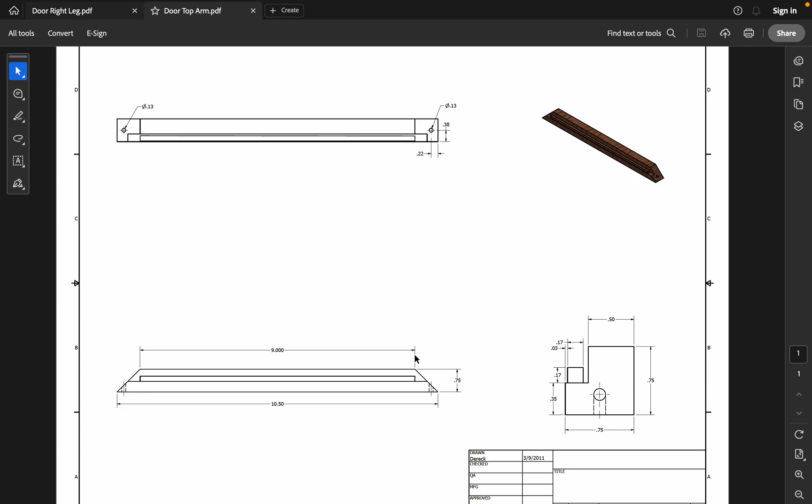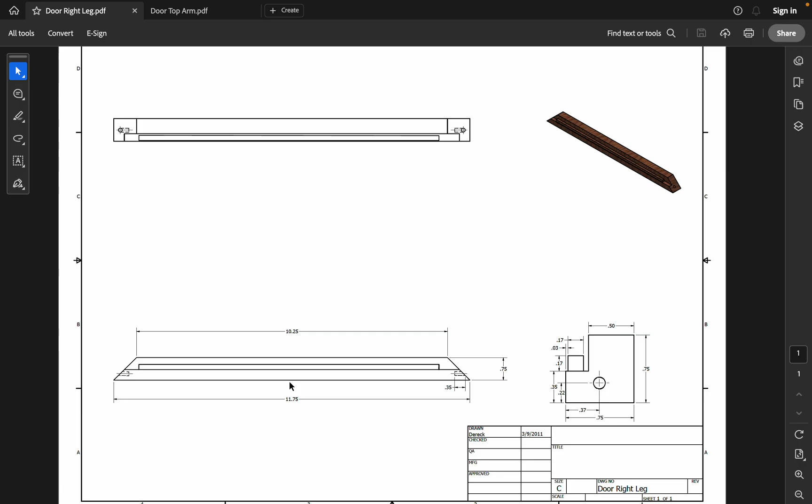Okay, so we're making our next part. It's going to be the door top and bottom arm and the door right and left leg. These parts are going to look pretty much the same. The main difference is their length. The right one is 11 3/4 long, and the top one is 10 1/2.

So I'll just make one of the parts here, and then you can end up making it a second time. Now you only need to make one of each part. As you put them in the assembly file, you're going to be able to just duplicate them. So create both top and right, and then at the very end you can name them top/bottom, right/left, so you can keep them kind of distinct. So I'm going to start with the door top arm here.

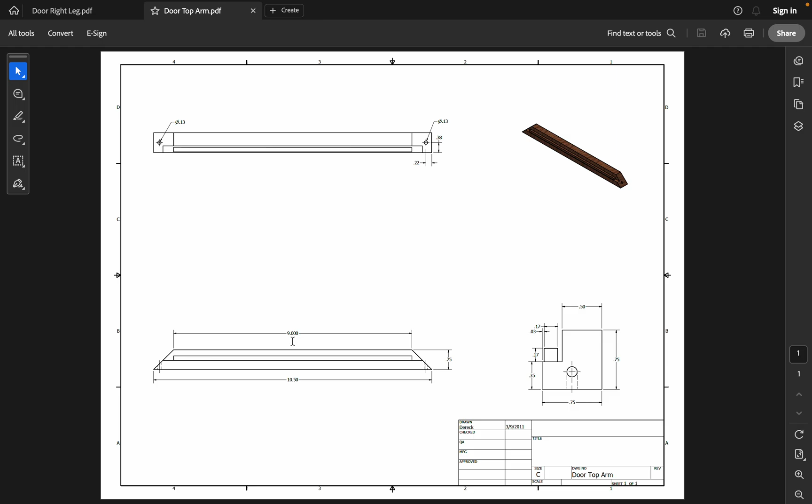So looking at the plans, my front view, top view, then I got the right view, and of course the 3D view. So zooming in on this part, you'll see that this is going to end up being two separate pieces. You're going to end up gluing a scrap piece in there to hold the glass pane in. Now there's also holes in the miters here. That's going to be for dowels, another type of joinery. So we've got to miter these and dowel them, and then we'll make a piece of scrap to glue in the glass pane.

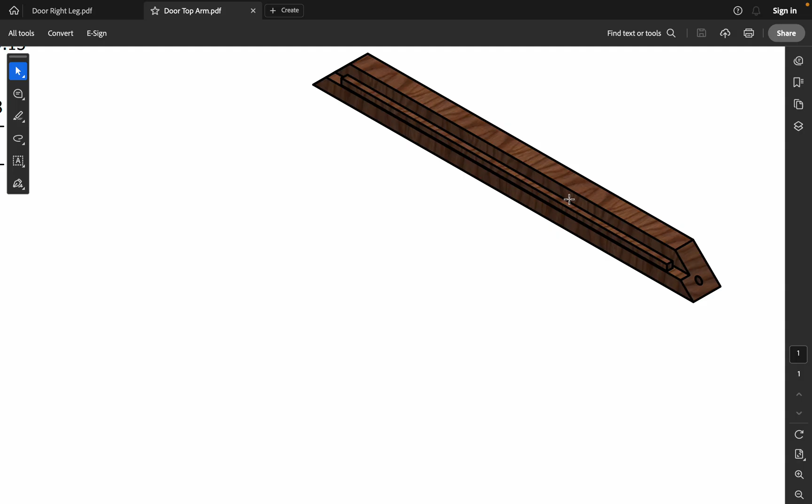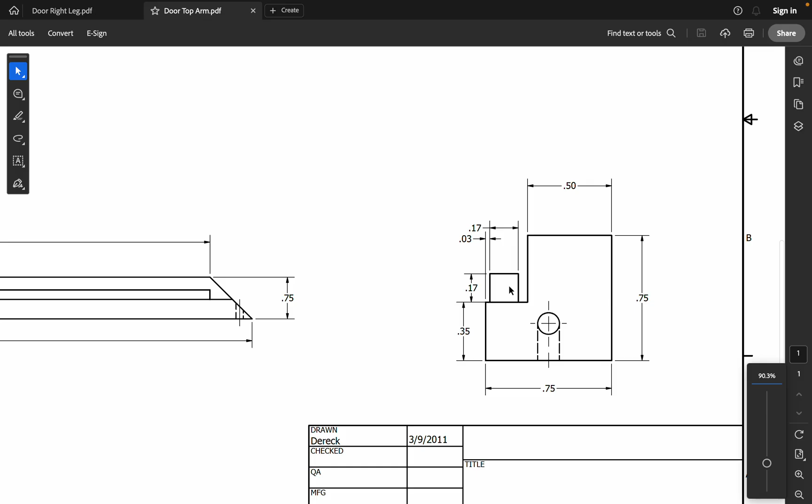If you already watched the base, you're going to end up mitering them the same way, 45 degrees. And instead of adding a groove, you're going to add a little rabbet right here. So we're going to notch that out. So what I'm going to do is draw the right view here. I'll make the rectangle, and then I'm going to cut out this spot right here, and I'll leave this guy and put him in at the very end. So let's jump into Onshape, and I'm going to start with a rectangle that's 3/4 by 3/4.

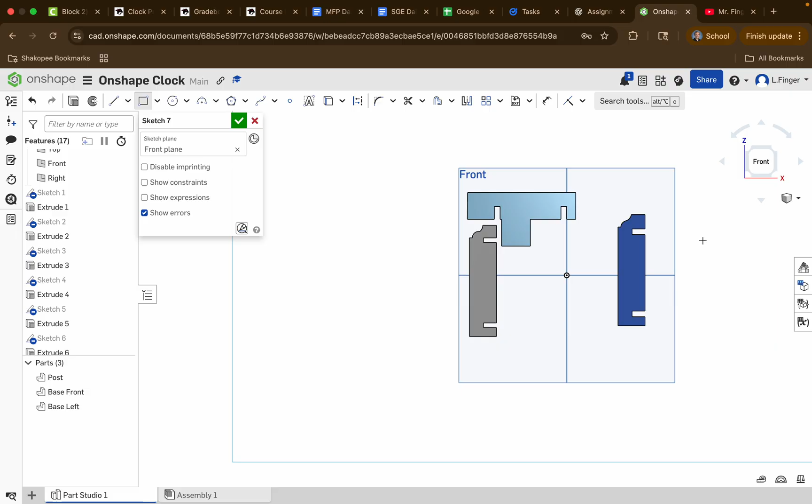So here's Onshape. Go to sketch mode. We're going to click on the front, and we're going to hit front on the cube. We're going to use our rectangle to make this rectangle stock. I'm going to put it a little bit further away so we can see what's going on. Okay, 0.75 by 0.75. Good. So we got the maximum thickness and width there.

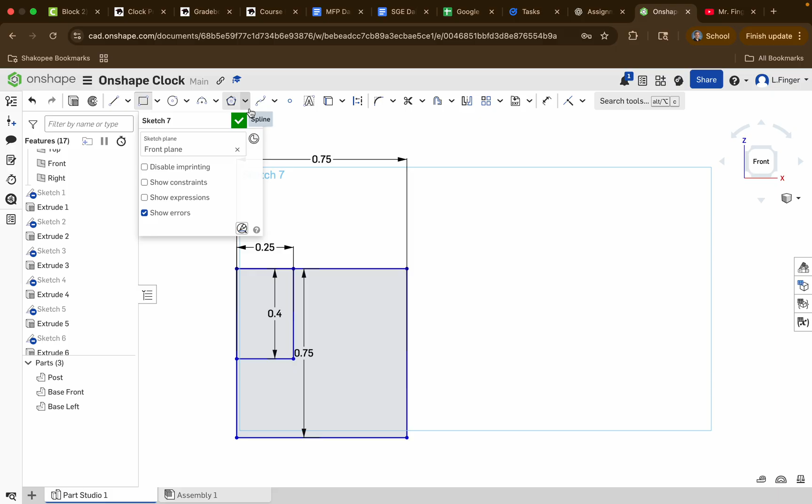Now I'm going to put a second rectangle in to cut this out. This rectangle is going to end up being 0.75 minus 0.35, so that's 0.4. And then this measurement right here is 3/4 minus 1/2, so 1/4 inch. So from this corner, click it, drag it down. The first number that highlights is the top one, so let's do 0.25. The other one is 0.4. Good. So first sketch is done. Hit OK. Now it's hidden, so let's rotate it.

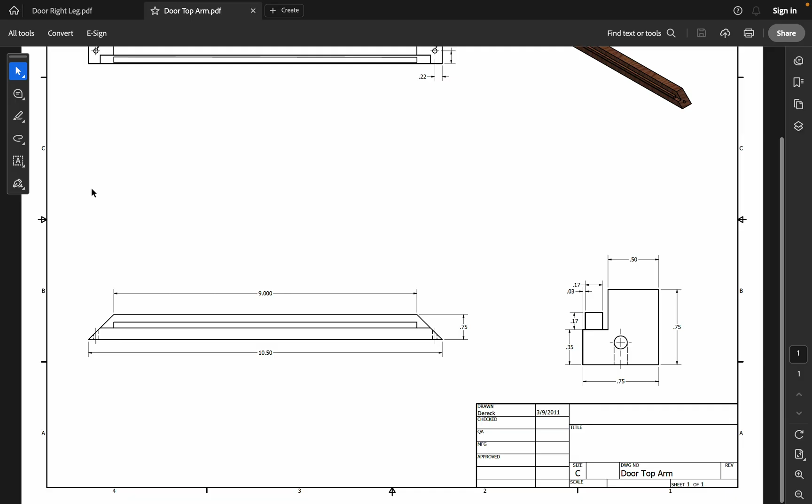We're going to extrude this 10 1/2. Now if you were going to do the other one, since this is the top arm, it's 10 1/2 for that longest dimension. The right one would be 11.75. So we're going to go 10 1/2. Good. So we got our main part of the arm done. It's time to miter it, and then we'll glue in a piece of scrap.

So to miter this, I'm going to flip it upside down. Now we also want this side in. You don't want to actually see it. You don't want to see the edge of the glass pane. You don't want to see the scrap.

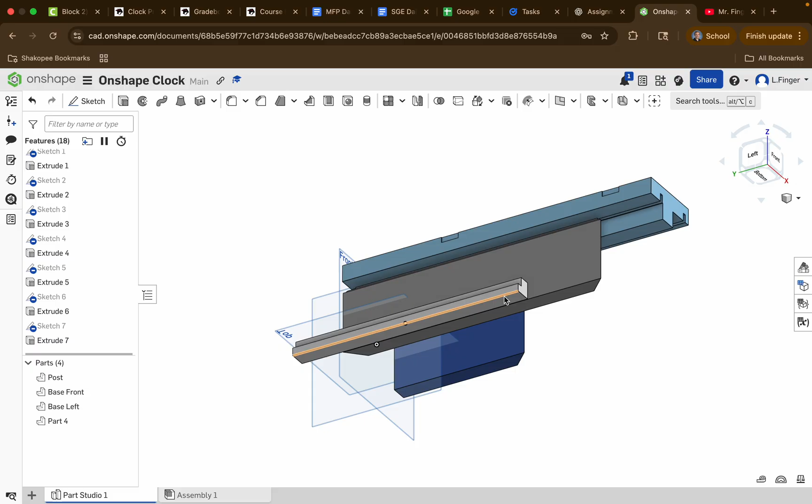So we need to end up mitering it so you won't see it when you glue it together. So flipping it over, that's going to end up meaning this corner will cut into the part. So it looks like it's this corner cutting in. Just making sure. Yep, we want this side, this exposed edge, to be long, just like this one. Where the grooves are on the inside, this cut is on the outside.

So we're going to sketch again. Sketch this face. Grab our line tool. Click from corner, over, and then we're going to click from this corner, in. Okay, so they both should be pointing in. So when you add a second miter, it'll make 90 degrees.

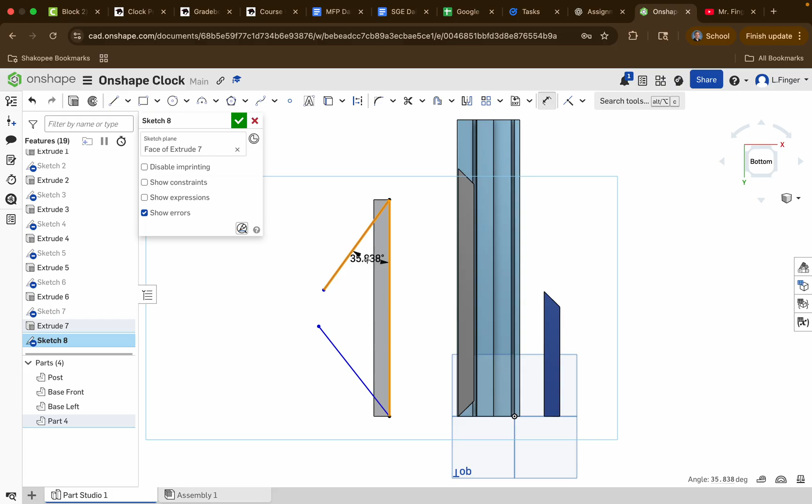Now, I just guessed the angle there. It's not going to be correct. Use your dimension tool to force it to be. So this angle right there, okay, that needs to be 45. Same with the next one. 45. The last step with the miters is to finish sketch and extrude by removing. Okay, 1 inch is fine. Cut it away.

There it is. So we got the first door part done. We got to add that scrap piece in to glue in the glass now. So let's rename this to door top slash bottom. Top slash bottom. Okay, then I'll make the right left one after. As far as the dowels go, we're also going to leave those out for the time being.

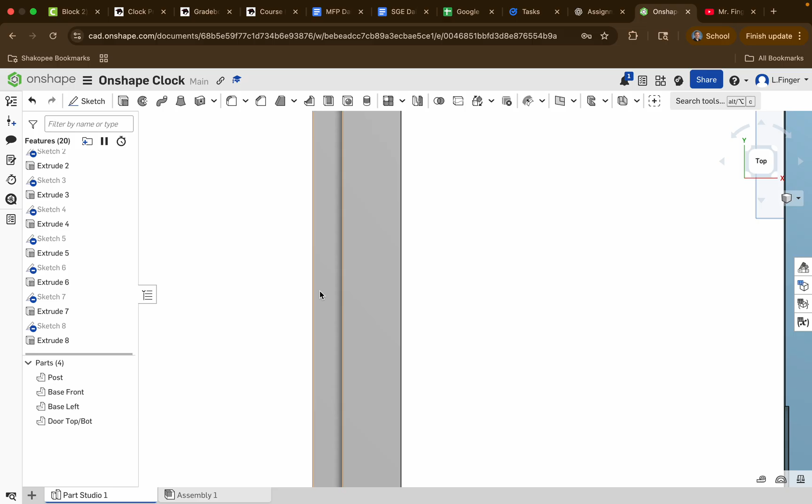So we're going to go top down, and we need to sketch a little piece of scrap in there. So if I look at this from the front view again, that scrap sits on the smaller side there. So we got to put it right in there. All right, so I'm going to zoom in. I'm going to sketch this plane. Okay, and I'm going to use a rectangle.

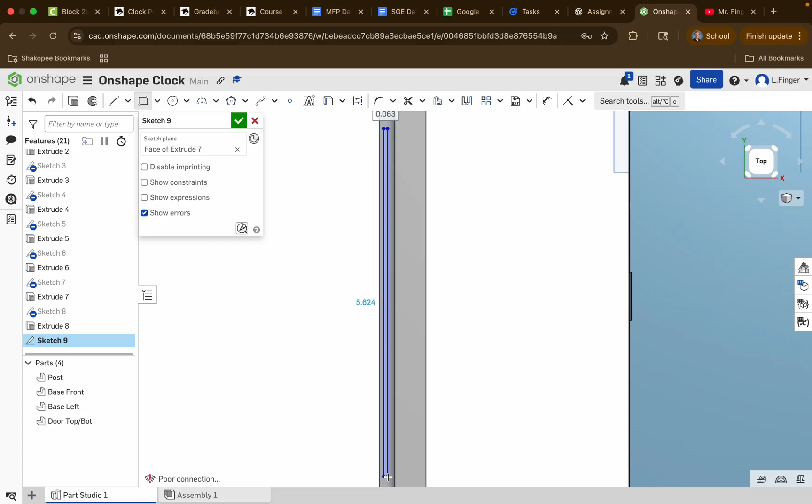And you can put just a small piece in there. Doesn't matter if it's 5 inches, 6 inches. You know what, I could make it 8 inches. Okay, but we don't want it to stick out. So if you're able to move it down, I would move it down. I think I'm just going to Command Z, leave it pretty small. Doesn't have to be super big, as again, it's just scrap.

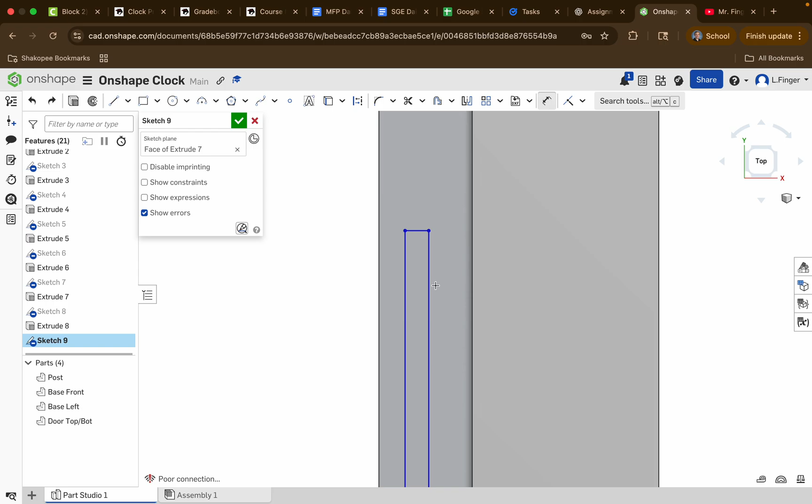All right, what is the dimension of this right here? So just a 16th. We're probably gonna end up working with a 1/4 inch here. All right, so it looks like it just saved my length. I'm gonna end up deleting this piece here and trying again. Let's just make another rectangle. Sketch, rectangle.

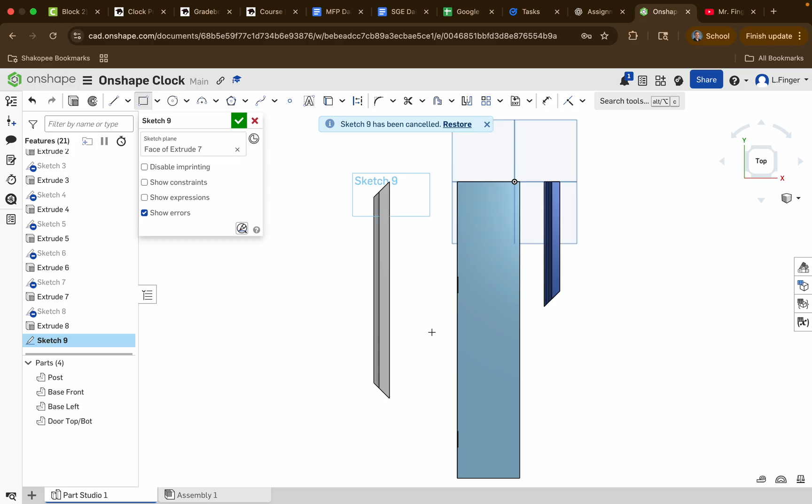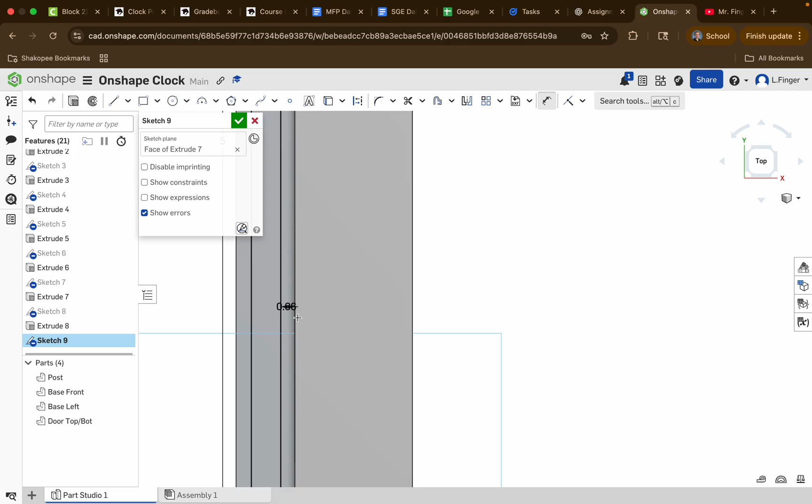Okay, from here over, let's make that point. Oh, let's make that 5. And then 0.125. Okay. And then we're going to space this out. The total distance is a 1/4 inch. So let's just make this a little bit less, like a 16th. So 0.06. Okay. And that should be pretty good.

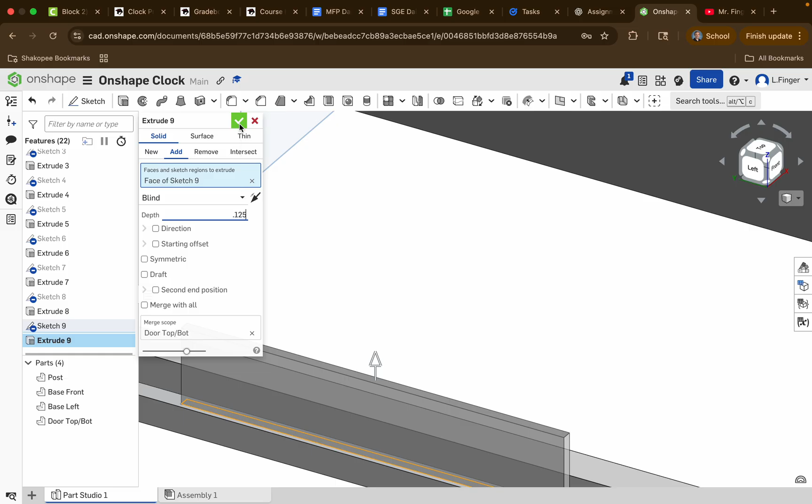Now again, I could make it longer. I can make it look prettier. I think I'm going to leave it for now. And now all we have to do is extrude it. So, extrude. Click that surface. And let's make this also an 1/8 inch, 0.125. Okay. And there it is. That's the last part of the door top/bottom. Okay. So you would make another one.

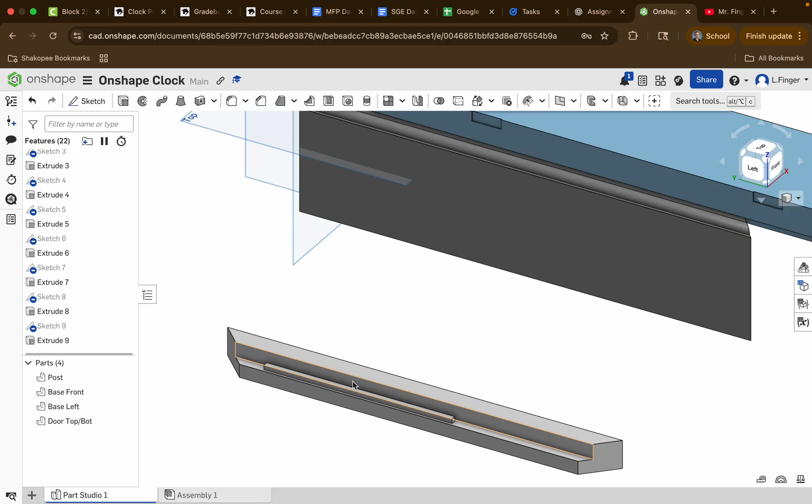Yep, this scrap piece doesn't look very good. I encourage you guys to make it look better. You can use the dimension tool or make it larger or get it on the center point here. But I'm going to leave you with that. Make the next one, which would be the left-right.